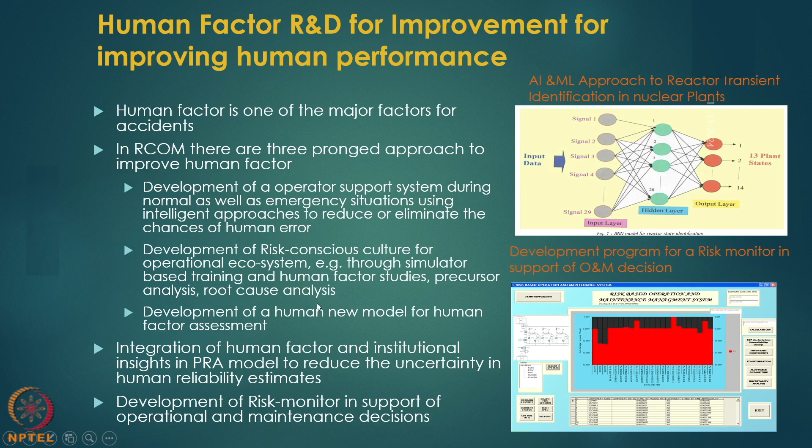So this is regarding transient situations where an accident is not there, but we talked about anticipated transient without scram for those kinds of scenarios. And when we systematically want to do this kind of documentation, we can revisit our technical specification also, because if we convince the regulator, they might provide the waiver.

So with this I will start the case study on a risk-conscious approach to safety surveillance, test, and maintenance intervention. I told you there are ways. If we do more testing, then it is a stress on the human team. But if you do less testing, it should not go toward increasing the risk. So that judgment has to be made; there should be optimum testing.

But suppose the plant feels we are doing unnecessary testing, and there are many arguments to support that, then we do a detailed analysis. For every change, a definition of the problem is required. Let us say based on 25 years of operating experience, it was felt that safety system testing frequency can be reduced from quarterly, once in 3 months, to 6 months.

This was a simple requirement. Now, if you start working on this, you will see what the system is, and try to understand which components are involved: centrifugal pump, valve, motor, common cause failure and all. Since you have been operating for 25 years, you have the failure data also. This failure data is crucial to leverage the decision you have formulated. And then the reasons are also given.

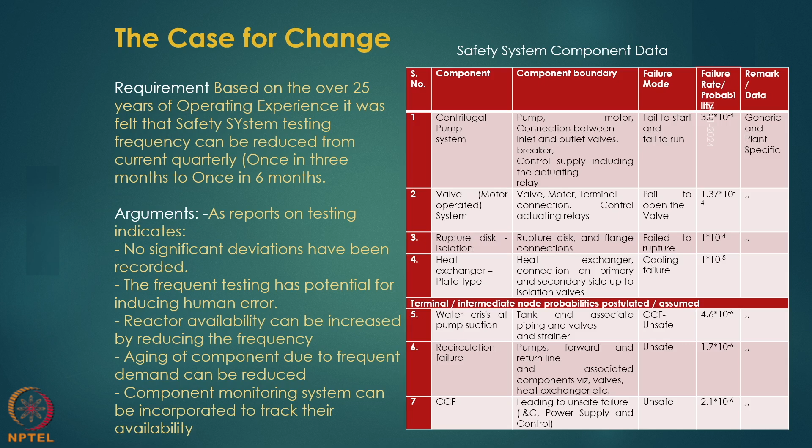So now for this particular case we are discussing, we have performance data of the system available with us, and we have translated it into a fault tree, and we got a result of 5 into 10 to the minus 4. So what are the failure situations that will lead to unsafe failure: no water at pump suction, injection train failure, recirculation failure, detector and I&C common cause failure. So these are the reasons.

You had data for this, and then, like we did in the previous case, we make the event tree. So this particular system was required for loss of coolant accident, and the frequency was this much. Then primary shutdown system, secondary shutdown system, emergency cooling system, we got various accident sequences. So this is a plant model. Together with this we create the plant model through event tree, and we have various consequences and their frequencies.

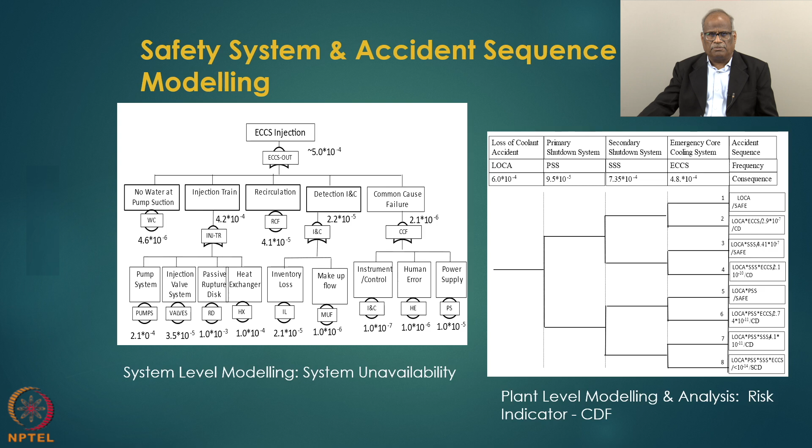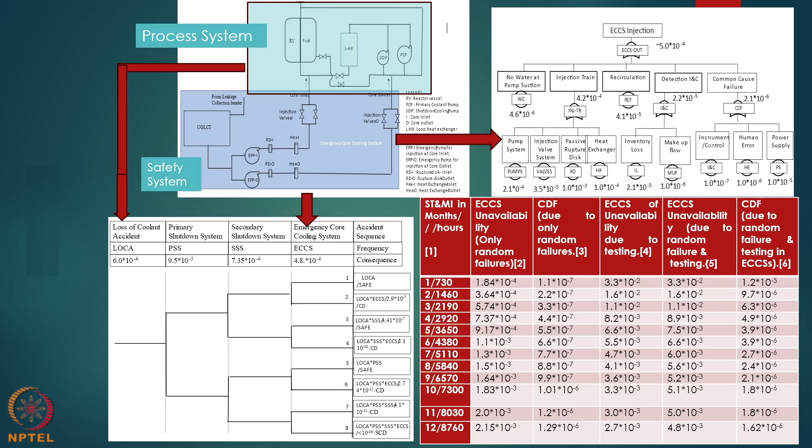And now it is left to the judgment of the plant and the regulator, and they might say no, it should be 5 months, it should be 7 months, but then we have a crystal clear case: what the situation is, what our assumptions are, and then you can call for a decision which is more rational than an arbitrary decision. We can go for this change or we cannot. So this is one decision you saw that has to be taken inside the plant.

The second case study is very important in the sense that every industry faces this situation: whether the plant life can be extended or not. And just arguments will not work here; scientific or rational arguments are required. So this is real. One case study was done for an irradiator plant, and a paper is there in the public domain, published in 2011 actually. So this work's academic quality as well as practicality has been demonstrated.

So the case was a risk-based approach to life extension of a cobalt-60 plant. Cobalt-60 is a radiation source used in facilities for medical sterilization or food irradiation, so that the life of the food items or sterilized items can be increased. So this is the case. Now, the core configuration of the plant is like this. This is the radiation source. When you want to irradiate a component, you bring it into this cell. When we don't have any load on the plant for irradiation, it goes and sits in the cavity.

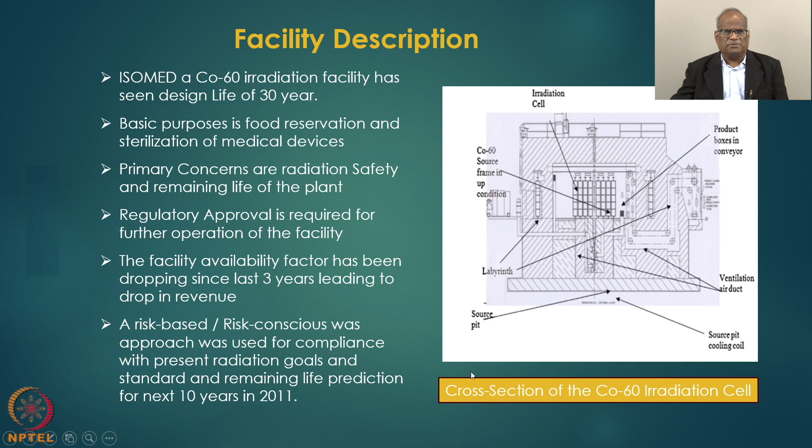So to give you a description, ISOMED is a cobalt-60 based radiation plant. Its basic purpose is food preservation and sterilization of medical devices. Primary concerns are radiation safety and the remaining life of the plant.

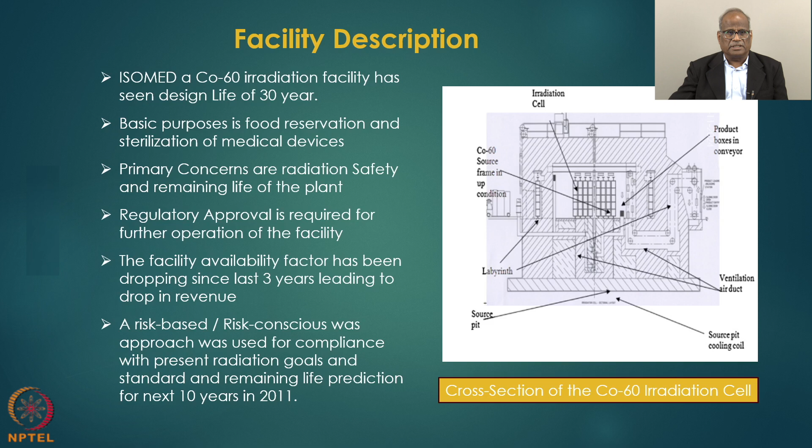Regulatory approval is required for further operation of the facility, and the facility availability factor has dropped. When plants start aging, the availability factor drops - that is one of the major signs, and this plant has also shown this, so they wanted to rejuvenate the plant. A risk-informed approach, or risk-based engineering, was developed and implemented, and this plant successfully got an extension.

The major procedural steps were plant familiarization, developing understanding of the operation, understanding the plant culture, collection of data from the plant, and use of professional software environment for developing PRA - frequency of initiating events.

So whatever is done for PRA, uncertainty modeling was a very special component of this exercise. Development of importance measures helps us formulate the maintenance requirements of the plant in a structured way, because testing every component is resource consuming. So we got a very elegant approach for doing this.

We identify components that require further analysis. You have to come out of the PRA regime, then send it for testing and qualify it for the remaining test period, like cables, wires, electronics.

So there are two major categories: some life limiting components and some replaceable components. Others could have medium difficulty in replacing. Based on this, if it is a life limiting component, it has to be attended in a different way.

You have to manage that by putting some extra layer or some repair maintenance. Replaceable components are very easy to replace, and components which have remaining life but are difficult to replace - those are very important for aging studies and so on.

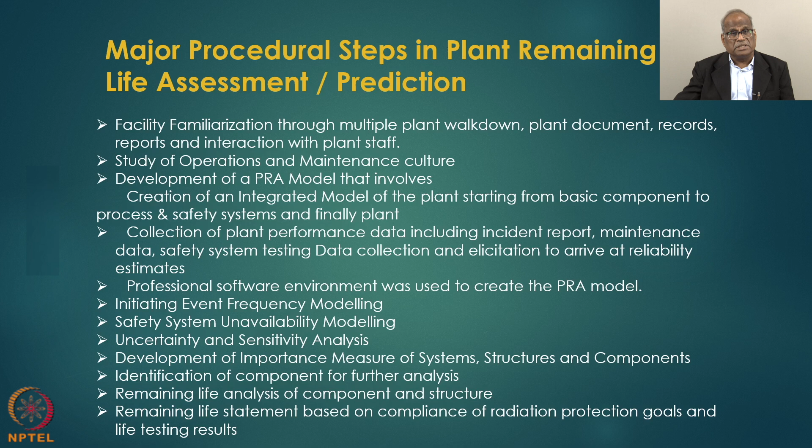Finally, you demonstrate through the study that life can be extended, and we are in a very safe domain - there is no threat to safety, and at the same time plant availability increases, meaning deliverables will also improve. This was the case here, where plant deliverables were also improved.

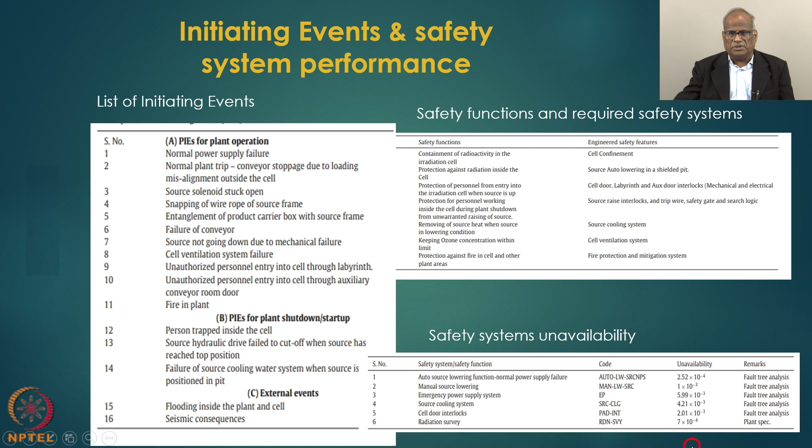As part of PRA, a list of initiating events and safety system functions were identified. You can go through the slide and understand safety system unavailability. We did the estimation using the fault tree approach, and then for fault tree modeling and event tree modeling, all those probabilities are there.

And this is the event tree. For example, for a power failure situation, 1.9 was the frequency, and then automatic shutdown of the source and manual lowering - so if the automatic source doesn't go down, manual lowering can also be done. So manual lowering credibility, like human action credibility, is considered.

We saw that there is no stress factor for humans in this case, so the probability was very low, 1 into 10 to the minus 3. Otherwise, for an emergency condition, the probability would be of the order of 10 to the minus 2, or 10 to the minus 1, or 1.

So source cooling, and then these header events - safety system, safety action - we got the consequences and likelihood. And here you see a new element: uncertainty analysis. The mean failure rate was 1.9, as I mentioned, with a lower bound and upper bound, meaning we are now trying to understand the uncertainty.

So in this lecture, we have covered the crux of the PRA and risk-conscious culture, and we have provided the upper bound and lower bound.

So we have 1.24 to 2.66. 1.24 is lower bound, 2.66 is upper bound, and 1.9 is the median or mean value. That is possible when we use the chi-square method to estimate the probability and frequency and provide the upper and lower bound. So this is uncertainty characterization, the easiest way to understand uncertainty and its characterization. And normally the result should be declared with this, because a point value is not possible.

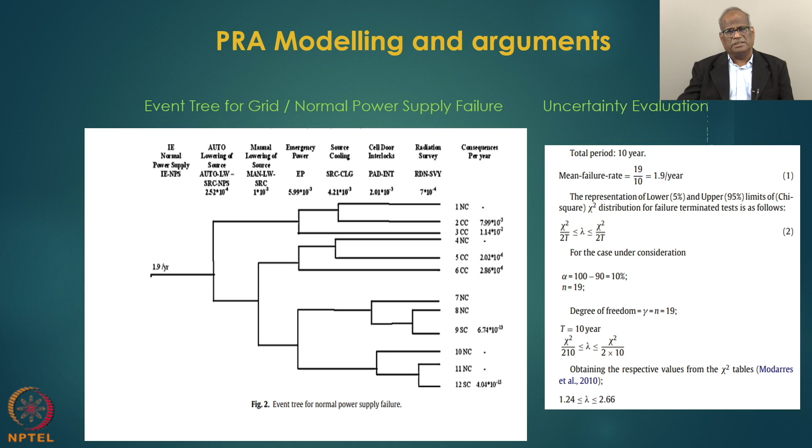You do some job today and tomorrow the value will change. But if you provide the uncertainty bound, you will always remain in that region, and that way is more acceptable, because randomness is part of any situation that we do.

Safety critical systems were identified, whatever codes they have to follow, and we identified the safety critical electrical system. First, remaining useful life prediction was done, and that formed the basis for the next 10 years. Now I am into another cycle, meaning the next 10 years has started, and the plant again requires a qualification. The same approach was used again, because the plant completed 10 years in 2011, and now we are into the 2020s and want to go into the 2030s. So one more assessment is required, but the procedure remains almost the same.

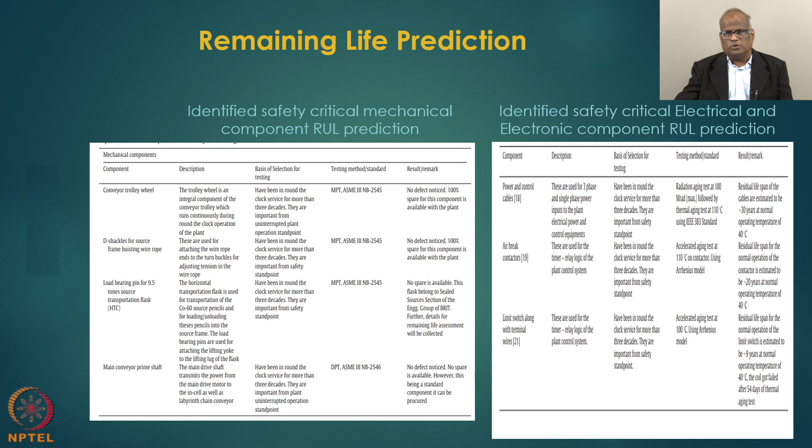The RUL prediction has been done, you can go through it. Then the radiation consequences and risk levels, their sensitivity analysis was done based on the criteria, and finally the exposure probability and risk profile of overexposure was also developed.

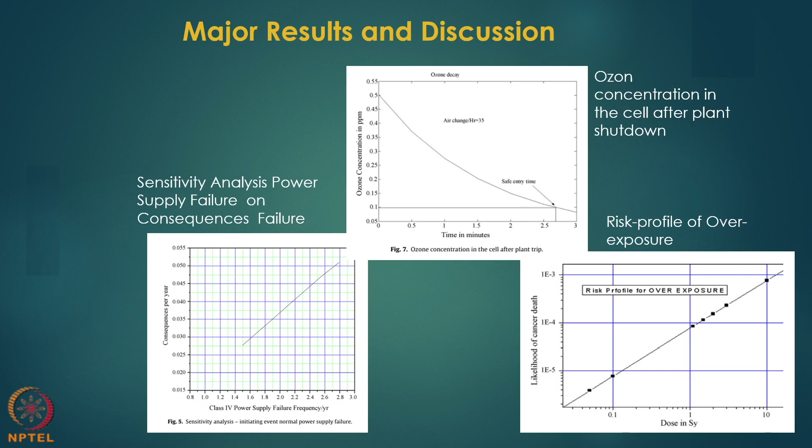This means consequences like ozone formation or similar effects. So consequences and likelihood came from probabilistic risk assessment, and consequence evaluation requires radiation protection knowledge and so on, and that's what was done here.

So now, to give a conclusion for this first week, why are we talking about risk consciousness? Because the history of accidents has shown in many fields that human factor is one of the major contributing factors to accidents, with the contribution ranging from 50 to 90 percent. So human factor requires more attention, and to understand the human factor, we need cognition, consciousness, conscience.

Conscience has entered because now we are talking about security as well. Plant safety and security together provide protection, so we have to consider both security risk and safety risk. Safety risk is what we call random failure, while security risk is a deliberate attempt.

So this is an era where we need to go beyond cognition and develop a concept of human reliability model for both safety and security. Human factor is central to enhancing safety, along with the role of AI and ML.

So that is one thing, estimation or understanding, but there are also deterministic provisions to reduce human failure, like an operator support system using artificial neural network or machine learning models, which can identify the transition and reduce stress. Stress is a major cause of human failure, so the model should be based on a human risk stress ratio.

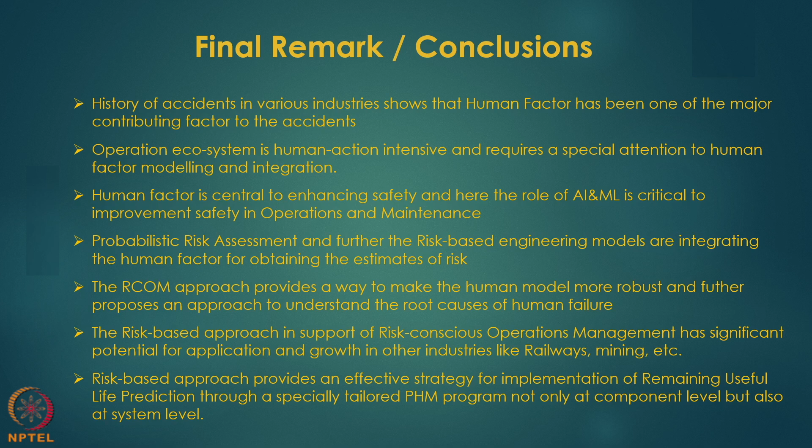So here we can say the risk-based approach provides a very effective mechanism for residual life estimation or for any changes in the plant. We covered two case studies, and there are many more case studies I could go on presenting, but this is an introductory week, and we will discuss more as we progress from module 1 to module 2 and all the way to module 12. There are 12 modules total for this course. Thank you.